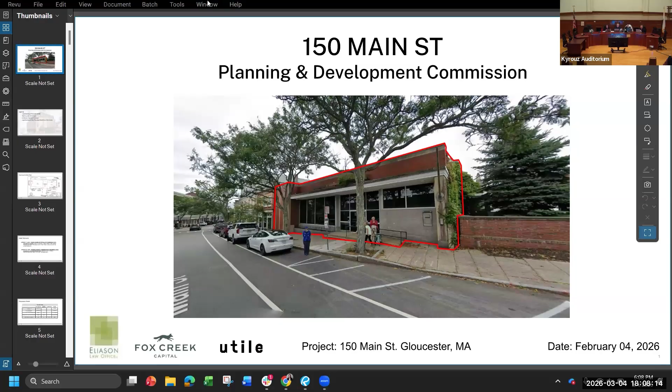Under Gloucester zoning ordinance sections 1.8.3, standard to be applied; 1.10.1, jurisdiction of the City Council and Zoning Board of Appeals, subsection A, City Council; 3.2.2, dimensional requirements for multifamily dwellings and their accessory uses other than signs, footnote A, the minimum lot area per dwelling unit or minimum open space per dwelling unit; 2.3.1, residential uses, subsection 8, conversion to or new multifamily or apartment dwelling, 7 or more dwelling units; 3.1.6B, building heights in excess of 35 feet; and 5.7.5, special permit criteria, major project at Main Street, number 150, map 8, lot 64 in the Central Business and City, the CCD district. With that, we have Deb Eliason here on behalf of the applicant to give a presentation.

I just want to start out that this is not a public hearing. At this point, we're not going to take testimony from people. Depending on how rambunctious the crowd gets, we might take some questions later on. I try to keep this as focused as possible on the presentation at this point. At any time, people can send us questions, and I will endeavor to make sure all questions and concerns are asked and addressed. You can send me questions and I will bring them up at any meetings, or you can bring me questions tonight if you don't feel comfortable asking them yourself. But we'll see how that goes. And with that, Ms. Eliason, go ahead.

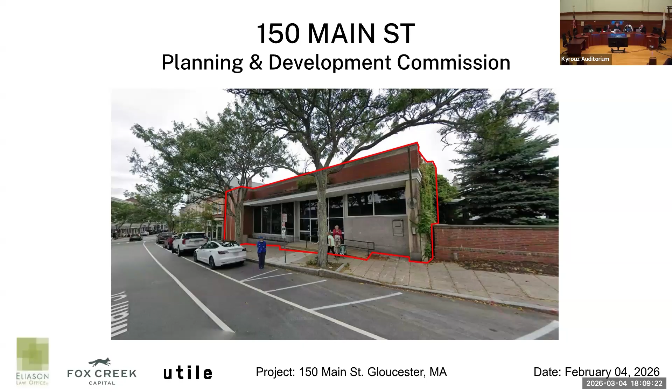Thank you very much, Mr. Chairman. For the record, Deborah Eliason, Eliason Law Office, 470 Washington Street, Gloucester. The applicant and owner is Gloucester Main LLC. With us tonight is Chris Boyce and Glenn Warren as representatives. The architect is Utile, and Michael LeBlanc and Catherine Bilgan are here on behalf of the architect. The property is located at 150 Main Street. Tonight, we'd like to give you a legal summary of the requested relief, a brief overview of the project. The architects will give a presentation with regard to the design, and then I will go through the legal summary of why we believe the requested relief should be granted.

Can I stop you real quick for one second? We had this issue on a previous application that came before us - footnote E on 3.2.2, the distance between buildings, does that not apply in this particular case? It does not apply in this case because it's considered one building. Okay, that's it, I just wanted to make sure we didn't miss it. Go ahead, thank you for that.

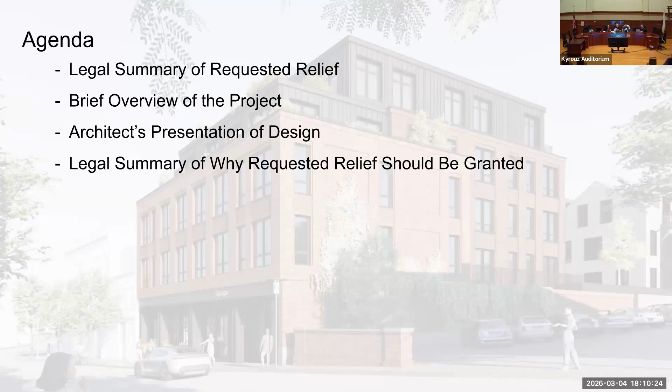The applicant is converting the building that's presently permitted for a bank and seeking to convert it to mixed residential and commercial space. The bank has not been operational at this location for several years, leaving a hole in the fabric of both Main Street and Middle Street.

The property sits in both the CB district on the Main Street side, and the CCD district on the Middle Street side. Approximately one half of the lot is zoned CB and the other half CCD. The Middle Street portion of the lot also sits in the historic district; the Main Street portion does not.

As you may know, commercial uses in the CB and CCD zones have zero front, rear, and side yard setback requirements and may be constructed lot line to lot line, which is exactly what the bank has been constructed as. Residential uses do have setbacks with a multiplier based on height. Hence, there was a need for variances from the zoning board.

On January 8th, 2026, the Zoning Board of Appeals voted unanimously to grant variances for lot width, front yard, side yard, a portion of the parking aisle width, and front yard vegetative cover on Main Street. Despite the complexities of this site, the project only required 5 variances, and if it had been a commercial use, none of these variances would have been required.

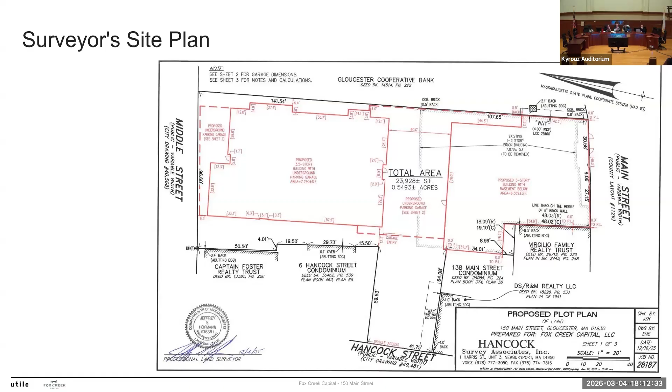We are seeking 4 special permits: under GZO 2.3.1 subsection 8 for multifamily with 40 units; under 5.7.1 for a major project with 61 bedrooms; under 3.2.2 footnote A to reduce the lot area and open space per dwelling requirement; and under 3.1.6B for a building over 35 feet in height.

The project has been thoughtfully designed to fit in the two distinct neighborhoods, and it abuts both Main Street and Middle Street. Careful consideration has been given to its residential and commercial abutters.

The applicant has reached out directly to the residential abutters, left a letter and contact information at their homes, and also met with several of those abutters to go over the plans and answer their questions. They also met with Bank Gloucester, the most direct commercial abutter, and will continue to maintain contact with the neighbors over time and during construction of the project.

Now I'd like to turn it over to Chris Boyce, the owner's representative, to give you an overview of the project and background.

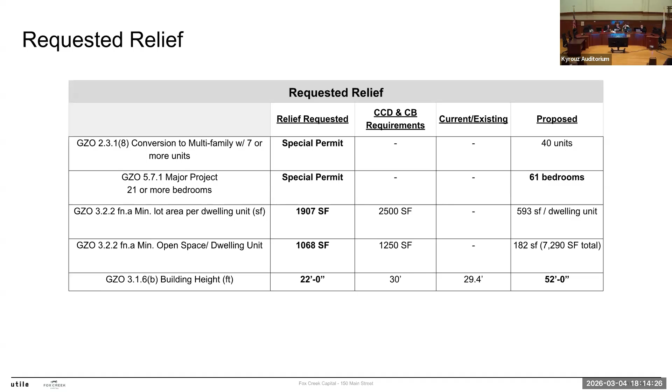Our philosophy is pretty simple: we invest with intention, we hire the right firms and design with care, and then we build projects that we really believe will strengthen the community they're a part of. We're long-term owners, which is really worth saying.

This is not a project, and none of our projects are such, that we would develop and sell at any point. We hope to hold on to this a long time. We will be neighbors in the community. That's the vision for this project, and that's the vision of our development group.

It's with that mindset that we approach our development at 150 Main Street. Today, as you probably know, the site is a vacant bank use. In the future, we hope to envision something that really contributes to downtown Gloucester—taking away the surface asphalt and the vacant, underutilized space and creating something really special.

So what the project does—let me look here—are three important things. There's a lot that we'll touch on in our presentation today, but three important areas: it creates housing where the city's comprehensive plan showed a desire for new housing.

So the downtown core was expressed as an area where housing is vital. It strengthens the downtown core, and that's what we feel our project helps create. It creates 40 rental apartments. These will be all rentals. Important to note, because that means it's professionally managed and maintained by us, with a viable, stable tax base. That's how we're able to stay as long-term owners and managers.

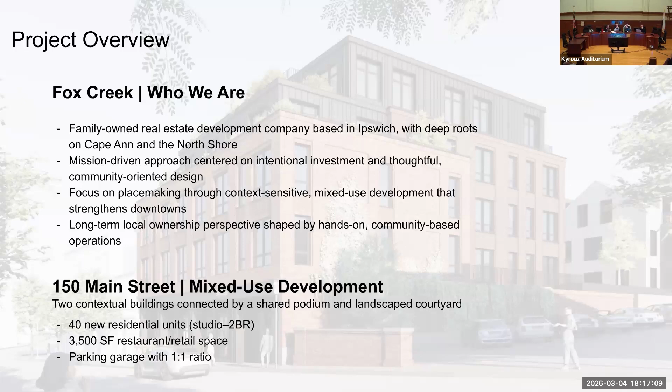This walks you through the comprehensive plan. Before the more exciting part of the presentation, when Michael LeBlanc from Utile will walk you through the design, there are a couple of questions that keep coming up as I talk to abutters—questions I think every development should be asked. First is traffic. Traffic was a major concern, understandably, for any new development in a city that is dense and vibrant.

For that reason, we hired Bowman Consulting Group, a traffic and transportation engineering firm, to do an independent analysis. They use the ITE—Institute of Transportation Engineers—methodology, a nationally recognized study of traffic in different environments around the country. At a high level, their traffic analysis shows that at the busiest hour of the day, what the report refers to as peak hours relative to our project, the busiest time will be 57 to 59 vehicular trips. For context, the previous use, a bank with some office space in the upper floors, under those same standards would have contributed 146 trips.

So that's about a third of the trips our project is generating, compared to before. They're also very different in nature—those residential trips are egress in the morning and ingress in the evening, typical commuter hours, whereas the bank would probably see traffic throughout the day. It's also important, when you look at how those trips are calculated, that not all trips associated with the project are new trips. Think of retail: you might visit our store, but maybe you're also visiting 4 or 5 other stores. The synergy of our retail space with double-sided retail on Main Street creates multiple trips that everyone has to count, but they're shared amongst the neighborhood.

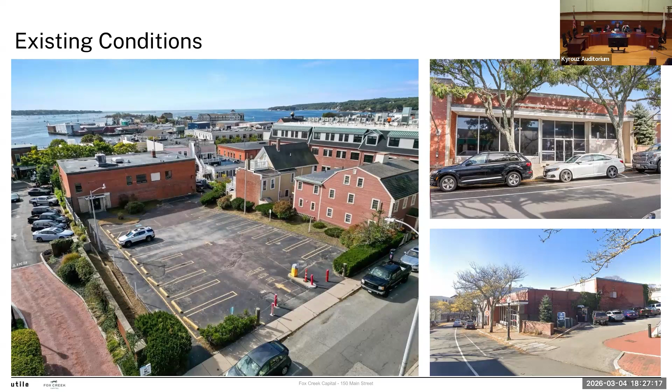So Middle Street has an interesting context, home to a range of different scales and uses, including residential, commercial, and civic. At the Middle Street end of our building, we're going to focus more on that residential scale—pitched roofs, clapboards, double hung windows—and really try to emulate that.

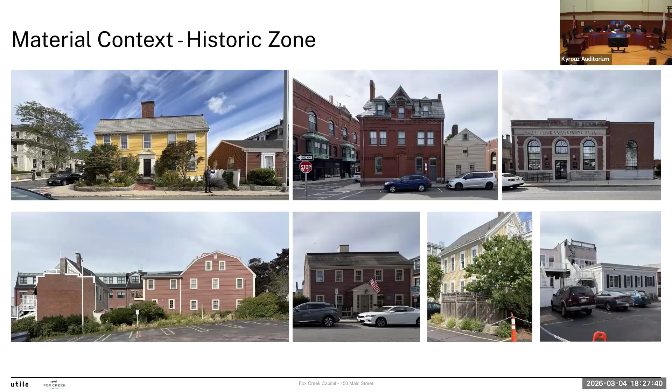Heading over to Main Street, it's characterized by active ground floor uses—bright, open, transparent storefronts built right up to the property lines, creating a well-defined pedestrian experience on the sidewalks. Above the storefronts there are typically one, two, or three stories of additional uses, ranging from commercial to residential.

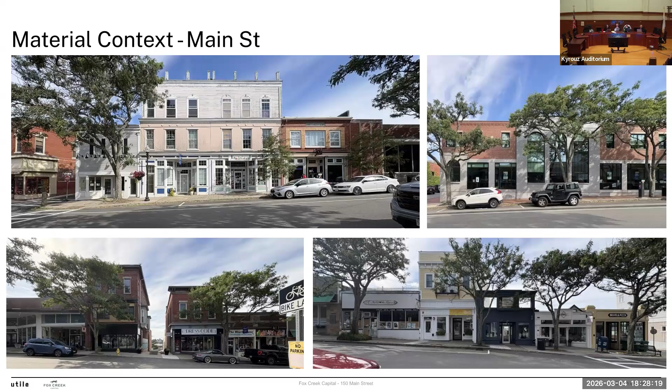Those buildings use a variety of materials ranging from clapboard, brick, stucco even. But we'd say there's a broad use of brick, and we were really trying to pick up on that for the Main Street side of the building.

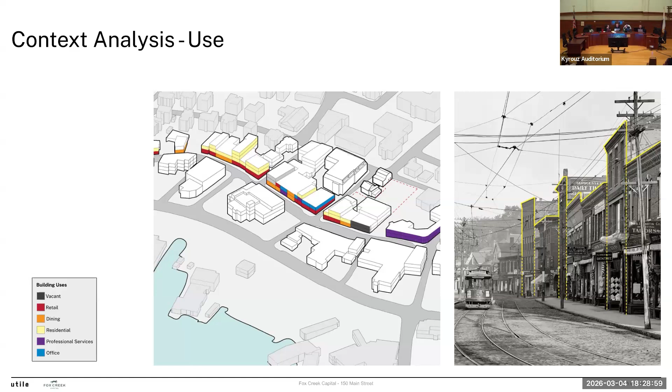Also, as we tried to determine an appropriate massing for the building, we looked at other existing downtown buildings for scale comparison and to look at their relationships to their neighboring buildings. What we found is a wide variety of different building scales, heights, and relationships—this variety is a defining feature of downtown Gloucester.

This kind of up and down variety adds to the whole streetscape and street experience for people here. We think it adds a great sense of complexity and beauty to downtown.

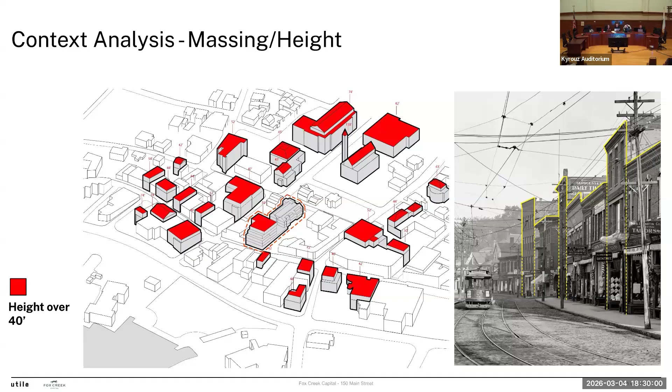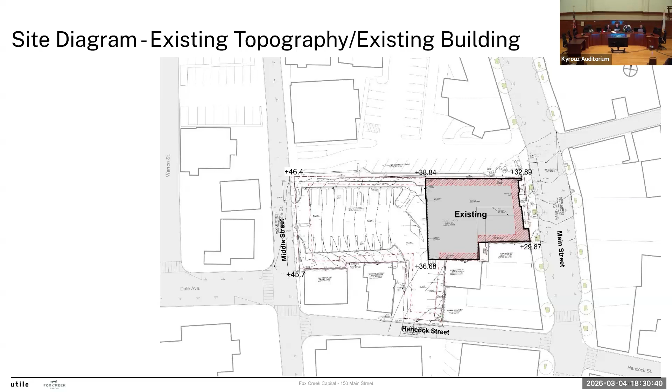So the existing site stretches from Main Street to Middle Street, which creates unique challenges such as meaningful grade changes. We have a historic district boundary that runs right through the site. We've already been to the Historic Commission and were unanimously approved there. It also provides challenges in how you lay out and mass a building here, in terms of doing one large building that stretches from one side of the property to the other, creating a lot of bulk, maybe unnecessarily, and also how that might affect mid-block light, air, and other considerations.

So rather than propose a building that is long, large, and bulky in footprint and floor plate, we instead pursued a scheme that proposes two smaller buildings, each thoughtfully scaled to their specific location on the site. They open up mid-block light, air, and greenery.

Main Street and Middle Street are exclusively pedestrian access, with residential entrances at both streets and retail access at Main Street. Vehicle access from Hancock Street allows us to slip parking underneath the building, addressing the guideline recommendation to not surround buildings with a sea of asphalt parking. As Chris said, we have a 1-to-1 parking ratio, which is remarkable considering from either Main Street or Middle Street there's really no evidence that there are cars in the project at all. Both at Main Street and Middle Street, our facades and massing align with the adjacent buildings, maintaining consistent streetscapes and being respectful of the surrounding neighborhood.

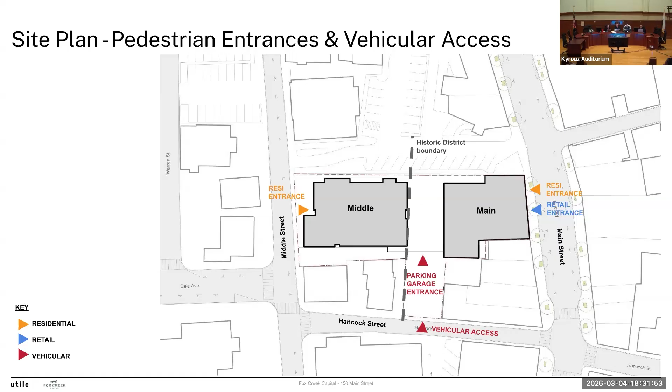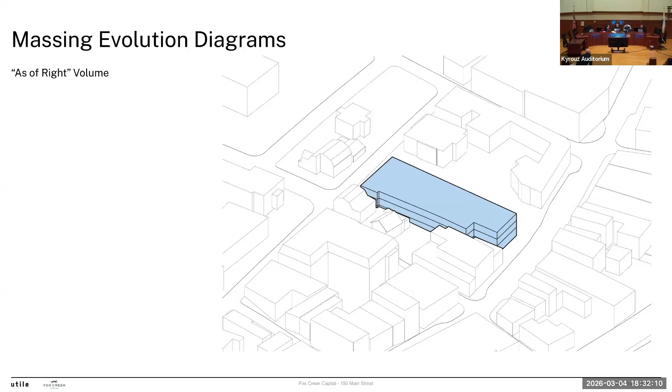So I'll take you through a quick series of diagrams showing how we got to where we are. This would be the as-of-right, long, large floor plate, bulky building from front to back. The first thing we thought to do was push it out to Main Street, because every other building on Main Street operates that way, with the exception of the one house down the street, which is historic and set back.

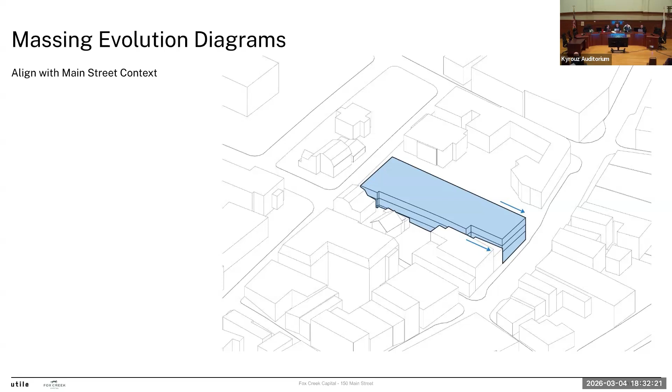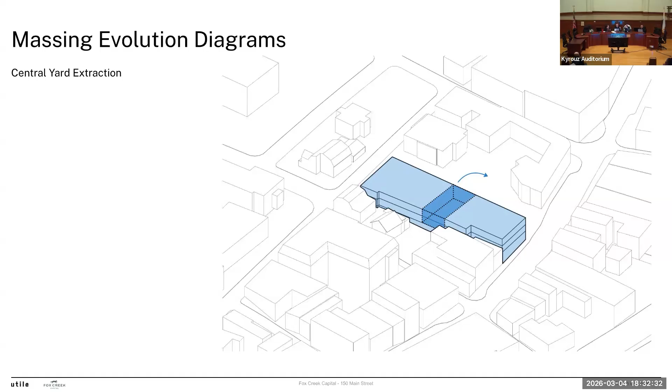We then thought about ways to open up the middle of the block, taking the program we were planning to put there and adding it to the Main Street building where it seemed more appropriate, opening up a nice, beautiful green space, or mid-block garden, as we call it.

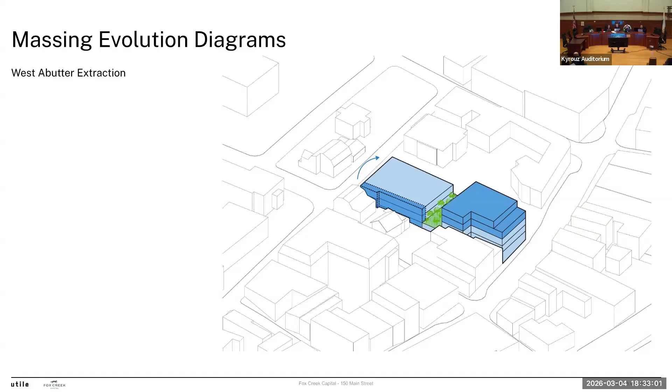We then recognized that our two residential neighboring buildings to the west could be crowded if we built right up to the allowed setback off the property line. So we decided to push back considerably from there, opening up the ability to have a large planted buffer, giving them more light and air, and maybe a nicer view out the back instead of a parking lot.

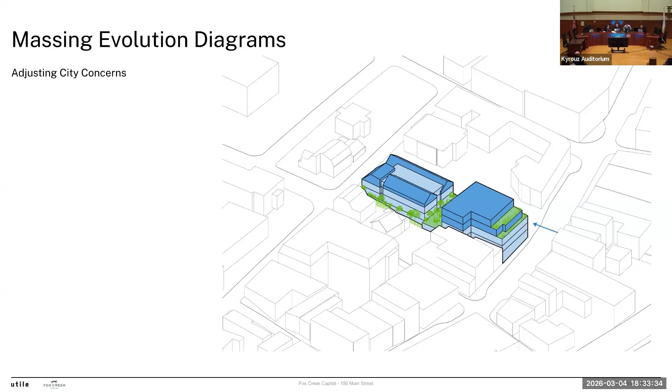After meeting with members of the town planning department, there were comments about how the building scaled on Main Street. We decided to relook at that area and push back the upper stories with meaningful step backs, green spaces, and terraces to really impact how that building is perceived from ground level along Main Street.

As we discussed, the site has about 15 feet of grade change from front to back. That allows us to slip the parking underneath the Main Street building while allowing the retail to daylight on Main Street. This also comes at a fairly significant cost to the project.

There's meaningful cost not only to doing below-grade parking for a project like this, but also meaningful cost in splitting up a single building into two different buildings. There are redundant elevators, redundant stair shafts, more building envelope. All of these are decisions we made with the intent to create two buildings that we feel scale better to the neighborhood than one large floor plate building.

So we hope you agree that two thoughtfully designed mid-sized buildings are a better solution for downtown than one larger, bulkier project that fills the entire site.

So at Middle Street, we've got a building that is a 3-story, but really a 2.5-story with a concealed third story behind pitched roofs. At the mid-block condition, we're at about 3.5 stories on Middle Street. At Main, 4.5 stories there.

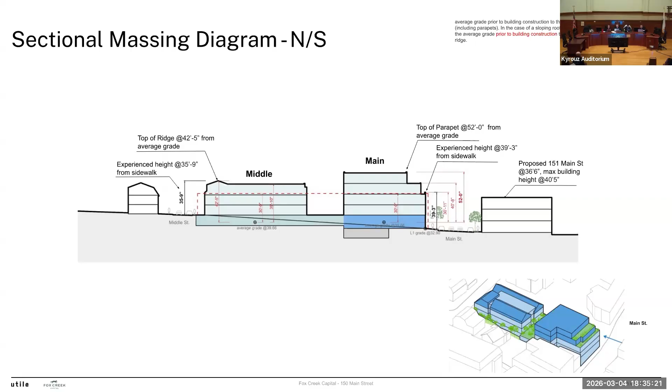And then when we get out to Main Street itself on the street side, the building rises up 3 stories before stepping back for a 4th floor, where we begin to break down the scale, and then an even more meaningful step back at the upper story, which really creates a condition where you don't see much of that floor at all from Main Street. We'll show you that in a moment.

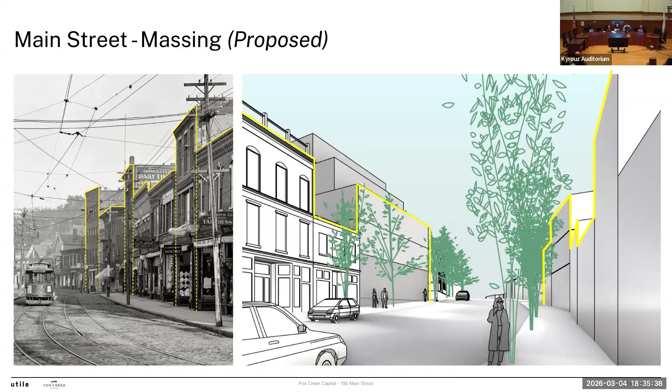This is just an illustration of where we started. We got a few comments from planning department members about the scale. We looked into stepping back those upper floors. That reduces our square footage on those floors, and it also reduces their presence along Main Street.

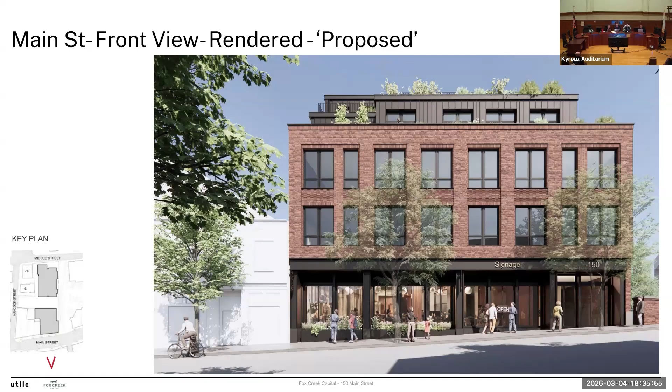Here's a quick view from the front of the building. This is from the adjacent sidewalk across Main Street. Looking at the building, you can see how those step backs, when scaled just right and stepped back just right, really diminish any impact they might have on Main Street.

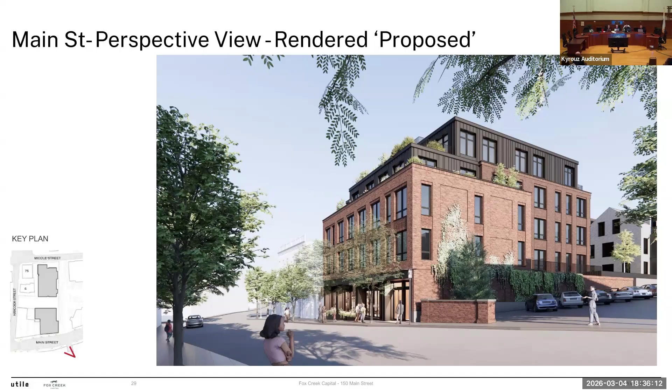A view of it looking to the east, and then another looking to the west from the east. You can see how the building begins to step back as the hillside starts to make its way up from Main Street.

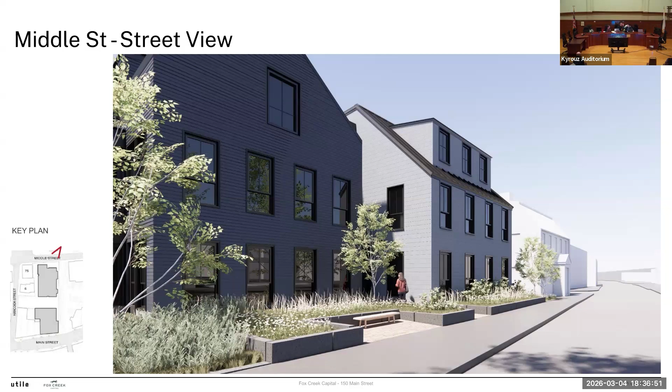So with the pitched roofs, it's showing on the middle. Here I see a different rendering of the way it will look. Because from the other side, it looked like it was 2 buildings, as I was trying to understand how it does, but now I see. Yeah, so we step back that centerpiece there to give it a little bit of relief between the 2.

This is a condition you see along Middle Street, with a kind of more formal primary building set to the front, and a secondary or service building pushed back a little bit. This was an important idea for us as we prepared our thoughts and approached the Historic Commission. This is to make it appear more in the character of the historic buildings on Middle Street. Is that correct? That is exactly correct.

Truth be told, there are lots of larger civic buildings along Middle Street, but some of those were built probably before the historic district was established. We feel like, given our direct abutters both across the street and adjacent to us, that this really was the least impactful, most thoughtful and responsive way to approach this part of the site.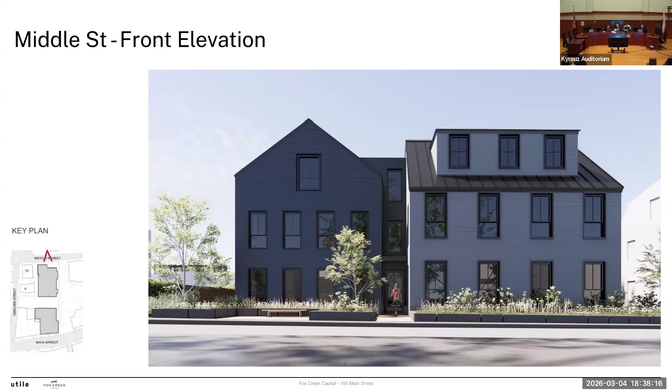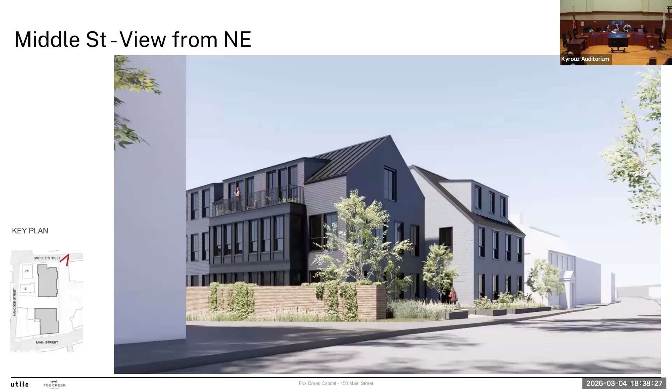So a view, stepping back a little bit, you can see the edge of Gloucester Bank on the left, and 75 Middle to the right of our project. You can see how our building steps back as it goes back into the site.

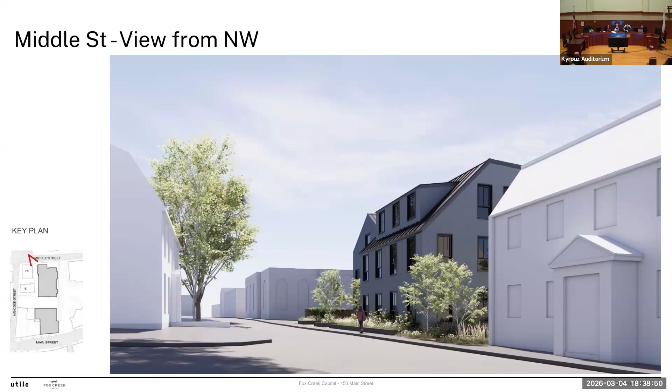This is a view looking to the southeast. You can see again 75 Middle on our right, how we're scaling with that. You can really begin to see here the step back we have from one part of our facade to the next. This also begins to reveal a little bit of the planted zone between our buildings and the 2 residential buildings on Middle and Hancock Street.

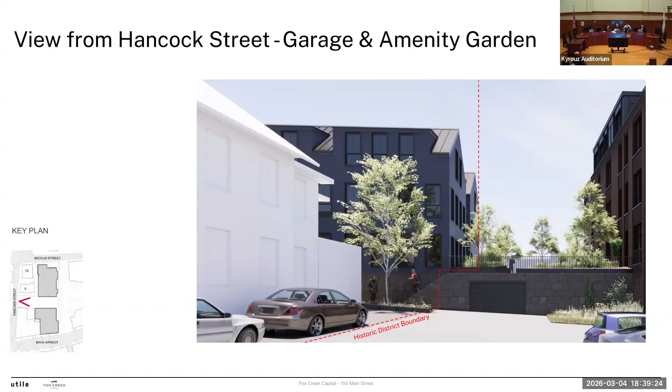This view also shows in 3 dimensions the historic district boundary here, so everything to the north of that was subject to their review. This shows you where our cars slip in under this podium and then turn left and go under the Middle Street building, and gives you a better sense of the light and air created by this mid-block garden space that we've created here.

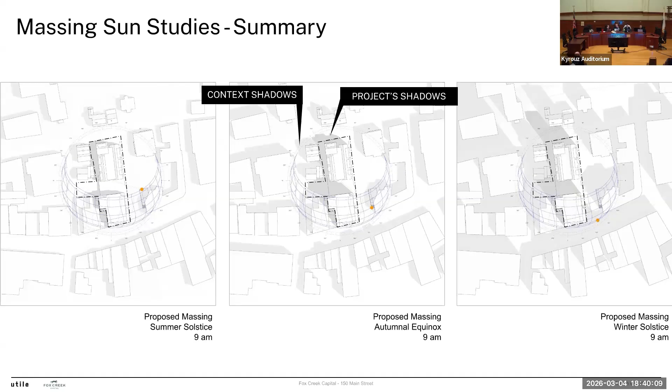We've done extensive shadow studies on this, looking at both what an as-of-right building would do and its impacts, as well as the proposed massing we're here with today. The differences between those two are, from a percentage standpoint, not huge. We wanted to point out how, particularly on the left here at certain times of day, the mid-block garden begins to allow light to move through, creating a lighter, airier condition at that moment.

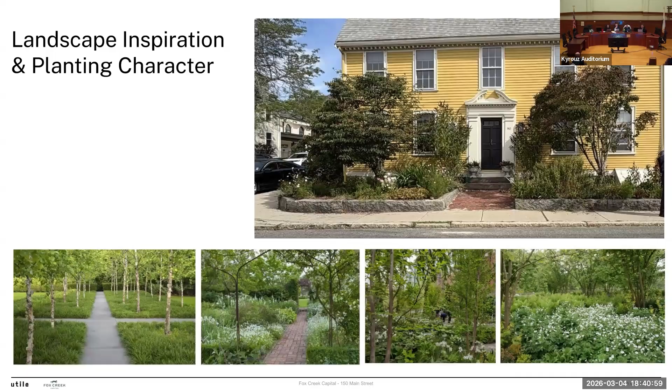Along the bottom here, we're proposing a lot of indigenous plantings, ones that will take less water, less maintenance, and will thrive in this particular location over time.

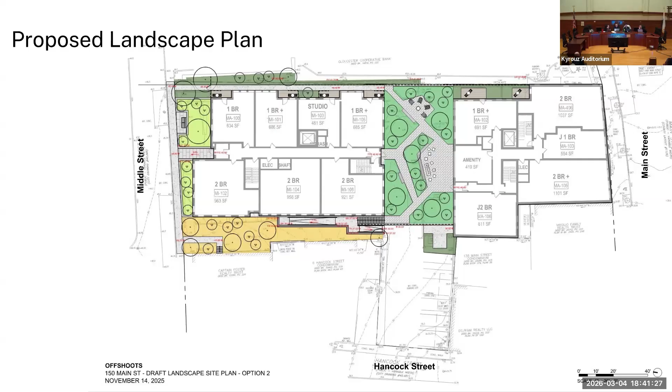Just quickly to look at this - on the left you see Middle Street, where we have those two gardens out in front, directly in front of our building. Along the west of our site, the yellow colored landscape is the planted buffer and the additional setbacks we have between our property and our neighbors. And then you can also see the mid-block garden as proposed.

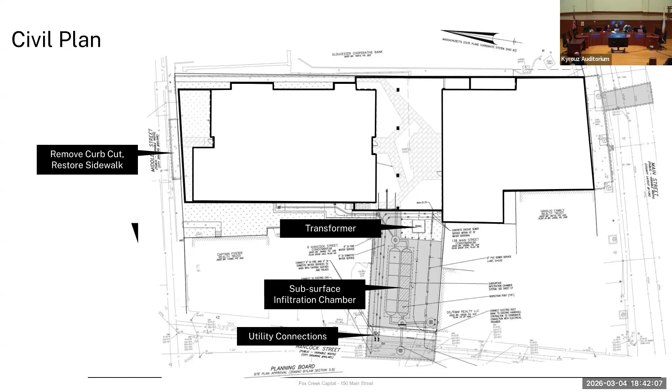A couple things we wanted to point out: we are proposing to remove the curb cut on Middle Street to make it a more pedestrian scale, which is a great restoration of the pedestrian nature of that street in the historic district. Our transformer is located in an area off street and will be concealed. Our subsurface infiltration chambers for stormwater, plus utility connections, will be housed on the small portion of the parcel that tabs out to Hancock Street.

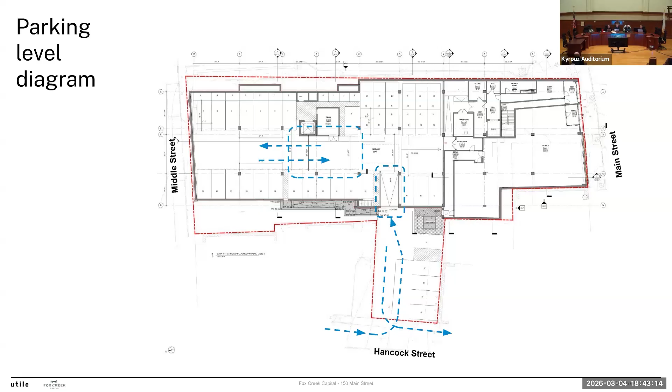So just to recap, we think this is going to be a great addition to Main Street, Middle Street, Gloucester, and downtown in general - the addition of 40 new year-round households, including 4 affordable units at 60% AMI. We think this project will improve walkability and ground floor retail activation on Main Street. We've planned the site to be individually responsive to both Main Street and Middle Street conditions in those different contexts. We feel we've provided a really thoughtful landscape which gives great buffering where needed, and good light, air, and respite at mid-block and along Main Street. The concealing of the parking below the building, keeping it entirely off Middle and Main Streets, we think is a real positive feature.

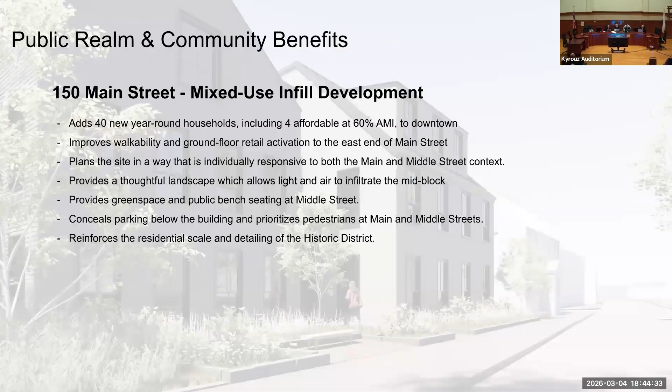We really like the way this building reinforces, on the historic district side at Middle Street, the existing residential scale of the buildings. So thank you for all that, and I'll hand it back over to Deb.

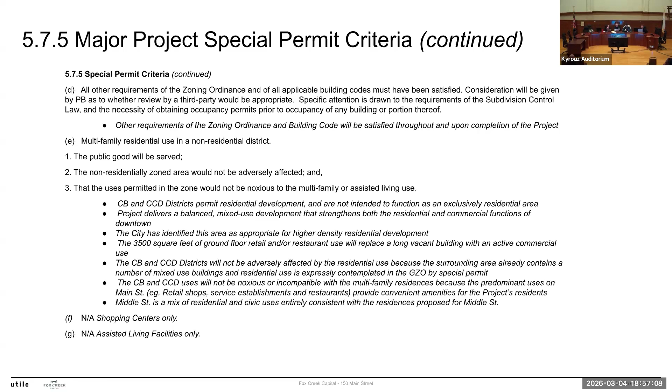CCD and CB districts already contain a number of mixed-use buildings, and residential use is expressly contemplated by the GZO. The CB and CCD uses themselves will not be noxious or incompatible with the multifamily residences because they are essentially retail, service establishments, restaurants. They provide convenient amenities for the project's residents.

On Middle Street, it's entirely consistent with the residences in that area. And the other requirements under 5.7.5 are not applicable to this project.

Regarding lot area and open space, minimal lot area per unit or minimum open space may be decreased by the council by special permit, finding that lesser lot area or open space is in keeping with the neighborhood and the structural density. The project has 23,720 square feet of lot area, only 10,000 is required.

Allowing reductions is appropriate and consistent with the character and structural density of the surrounding downtown neighborhood. Main Street is constructed generally with the buildings lot line to lot line with little or no open space, and where private outdoor space is generally considered by residents to be secondary to proximity to amenities.

The neighborhood amenities such as shops and restaurants are also a benefit to the residents, as well as walking access to Gloucester Harbor, Harbor Walk, and a little longer walk to Stage Fort Park, Stacy Boulevard, and Pavilion Beach. The rental apartments help sustain a flexible year-round residential population and contribute consistently to the local economy. It also contributes to a vibrant, lived-in downtown.